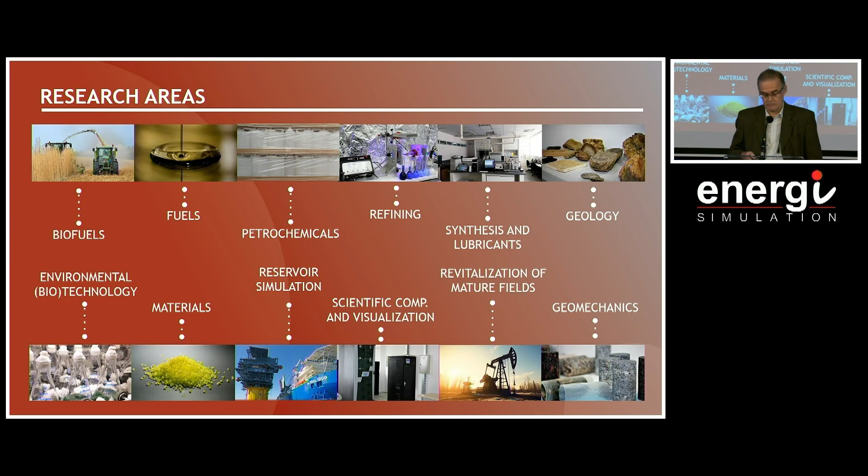And well, this is our integrated lab in Recife, Brazil, that now, since last year, is an institute. We have about 12 labs in different areas related to the oil and gas industry. And of course, we have geomechanics, geology and reservoir simulation, the teams related to this chair. And so we are here in Recife, Pernambuco, Brazil, in the northeast part of this country.

Everyone is talking about production, but very few people are talking about storage. So this is very interesting. It's an opportunity. We are already in contact with companies that are interested in storing hydrogen in salt caverns, since we have onshore salt caverns in this region. Again, on the coast we have industries. For instance, in our port, we have a refinery and a thermal plant for electric energy generation. So we have production of CO2, and there are also discussions about CCS.

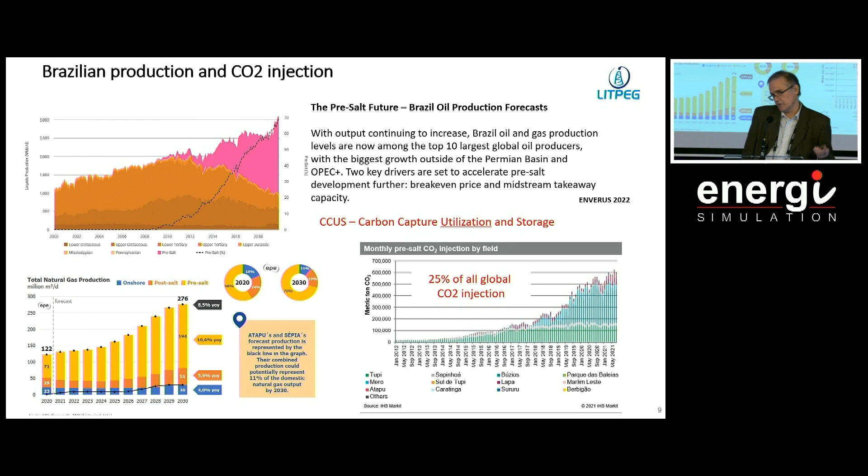And so we have this concern with injecting CO2. CO2 can dissolve in the water, and we have acidification, and then we have dissolution of minerals that will affect porosity and permeability, and change the properties of the fractures and the geomechanical properties of the rock. And this is the research interest that we have.

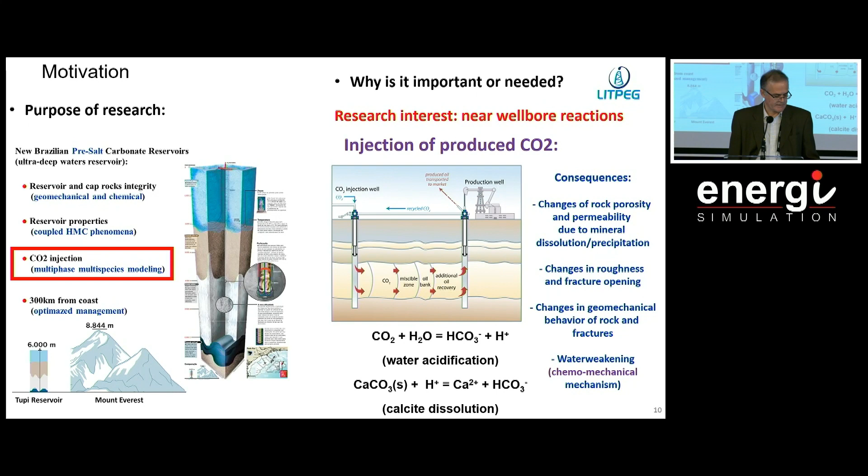And the chair is the main topic. So we proposed three years ago to apply this work to this problem, for both EOR and CO2 injection for CCS. But just now I will have the opportunity to apply it in CCS, because it's now becoming a reality in Brazil. The title of the chair is reservoir modeling and robust optimization, and the ingredients are outcrop characterization.

We have geologists in our team, upscaling, geomechanics. By the way, we have a poster presented by Aline on submarine landslides in a very important field in Brazil, where you have to do some slope stability analysis. So check the poster, it's a very interesting project.

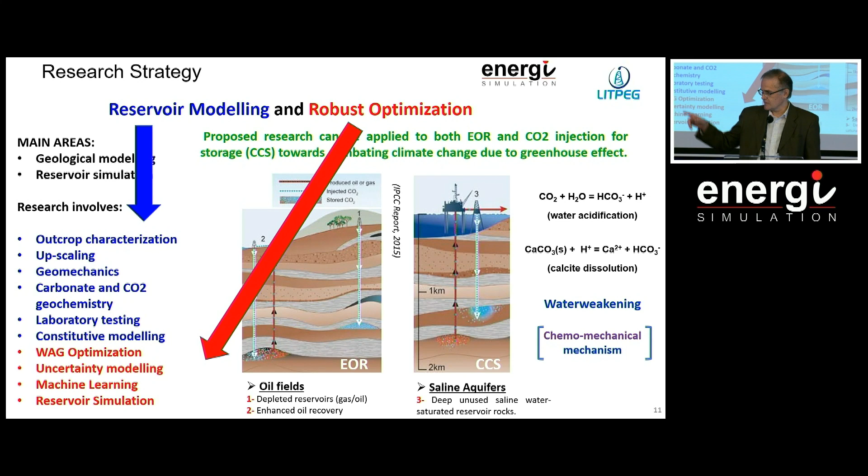And also laboratory testing, constitutive modeling, that I'll talk about here. And also optimization, uncertainty modeling, machine learning. We have a new project as well with Petrobras, on optimization with machine learning, that Alexandre presented in this session's posters as well.

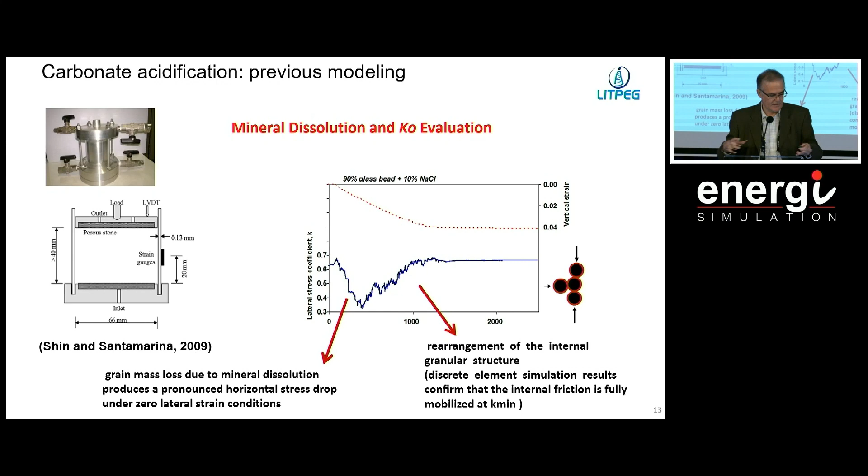So in this problem, this is a previous work that I showed you a few years ago, where we have this oedometric test: we apply a vertical load, we inject a fluid that will dissolve the rock, and we are able to measure the lateral stress, as we restrict the lateral displacement. So you have a decrease of the size of the sample, a loss of compression of the sample, and a decrease of lateral stress due to mineral mass dissolution. After that, with rearrangement of the internal granular structure, you have a tendency to dilate, and as we are restricting the displacement, we have an increase of lateral stress.

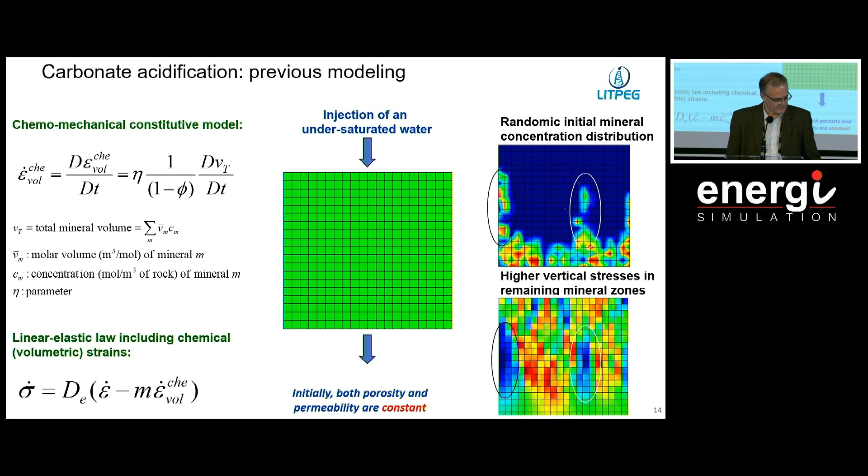Okay, so we can establish a chemical-induced deformation that is a function of the total mineral volume. In a finite element code, you have to run the reactive transport behind this to get the total mineral volume, and if it changes, we can induce deformation in the model. If you inject a reactive fluid, you can see here the front of dissolution, and where the mineral remains we have higher vertical stress, a non-uniform stress in the sample. You can model this and obtain, for instance, this decrease of lateral stress.

And if we consider elastoplasticity, a very simple Mohr-Coulomb model, we can introduce this envelope. And if we introduce softening, when the Mohr circle reaches the Mohr-Coulomb envelope you have softening, so we come here, and the only way for the lateral, horizontal stress is to increase, so we can have this increase of lateral stress. But unfortunately, it's not enough. We can do this qualitatively, but it's too simple. We cannot get a good correlation for more than one test.

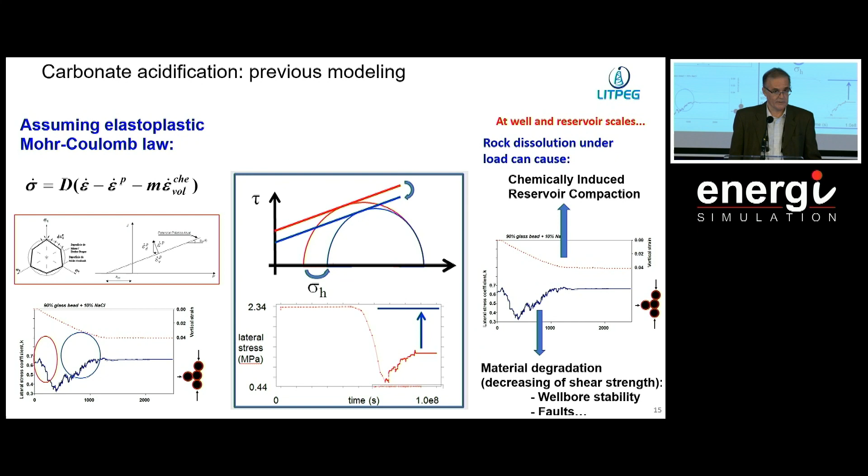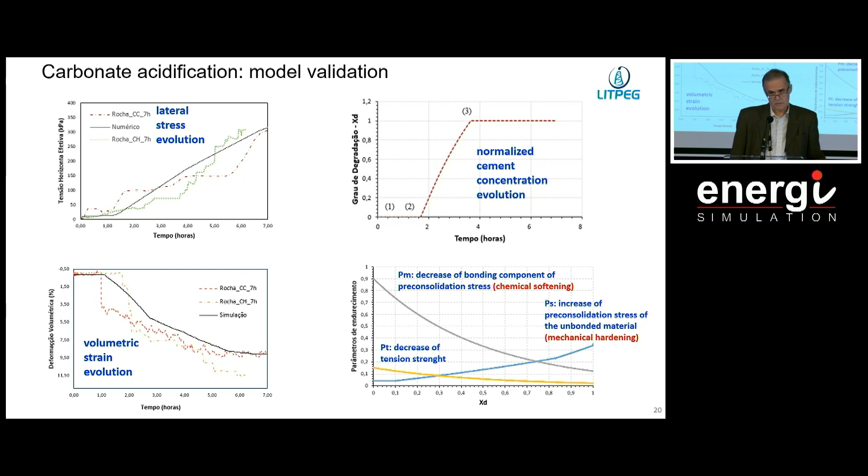What happens is that this surface is shrinking. This yellow surface is shrinking, and the internal surface is expanding. And so you have chemical degradation and pore collapse. And you also have the decrease of tension strength of the material. So we are happy with this, but it's not enough, unfortunately.

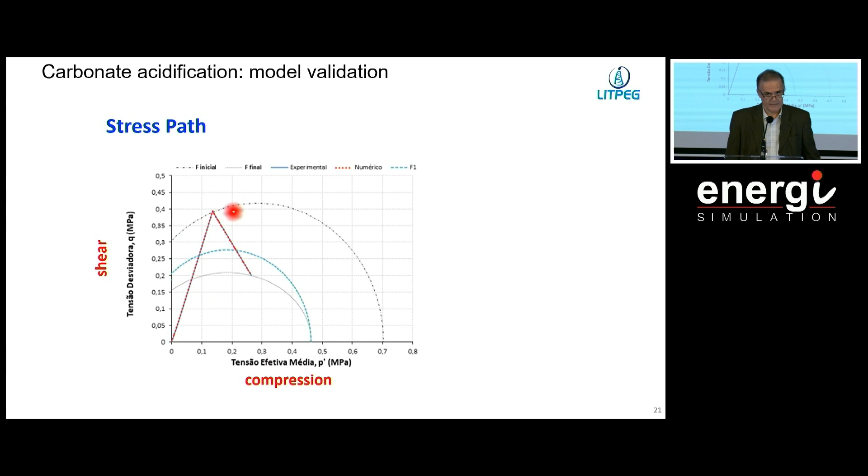Okay, we could obtain a very good stress path of the sample in the compression and shear space. So we can see here that the stress path during the test is the decrease of shear stress and increase of compression. And this is due to the decrease of elastic domain of the samples as it loses its cementation.

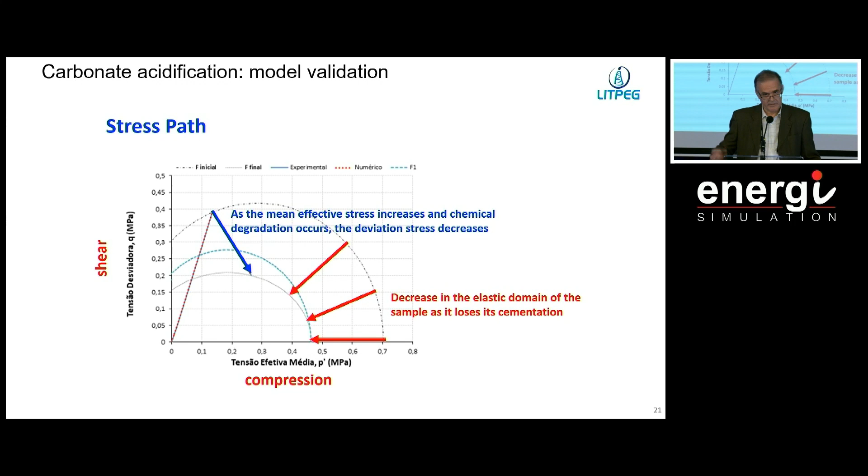So the initial yield surface is this one. So when you have the shrinkage of the yield surface, the stress state has to move from this point to this point, decreasing shear stress and increasing compression. So it's an elastoplastic mechanism that is triggered by the chemistry. And so as I mentioned, we are not there yet.

There is an important aspect that we have to implement in our model that is related to stiffness of the material. When we expose the samples to acid solution, we have the decrease of the stiffness, but sometimes it's not intuitive because you can see that all the samples with different acids decrease the stiffness here.

But if the acidification is too aggressive, we have the formation of wormholes, and so all the other parts of the material will not be degraded, so the flow will be concentrated to the wormholes. And in fact, the most acid, the pH 2 solution, is less degraded than pH 4 and 3. So it's complicated because you have to include chemical damage depending on the Damköhler number. The Damköhler number controls the formation of wormholes in the sample.

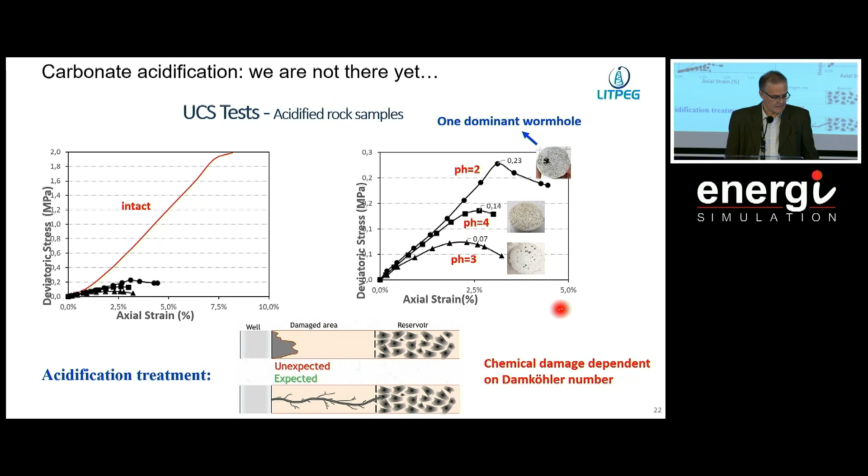So it's interesting because for low Damköhler number, you can have the damage area very close to the well. And for higher Damköhler numbers, you can have the wormhole, and then degradation will be a little bit far from the well. So the way that the chemical attack will happen depends on the rate of the injection of the reactive fluid. And yes, so it's in progress.

We have a new project with Petrobras. All this project is only experiments, but we are going to use these experiments to improve our model. In this case, it's Victoria. She was in the poster, and she's in charge of this project. We are using acidification of Indiana limestone.

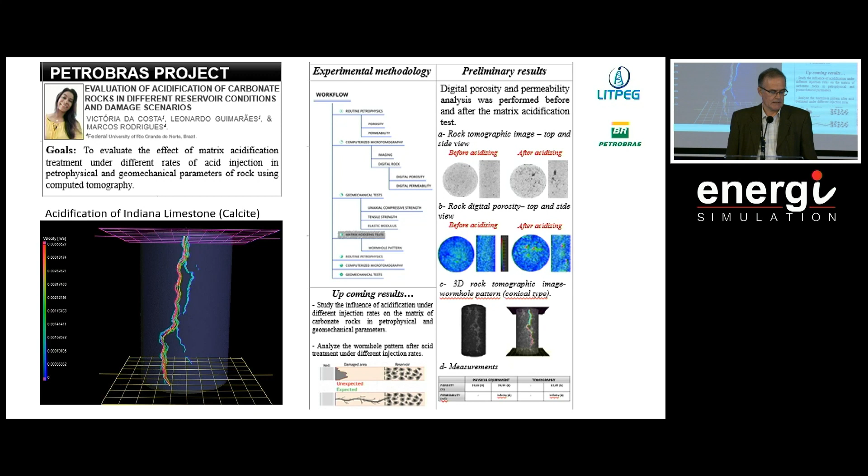Now we are working with natural carbonates. And the idea is to inject acid solutions and to check now using a triaxial test how this degradation can take place in more realistic rocks. We are going also to use rocks from outcrops, because in the next work that I will show, the composition of the carbonate will affect a lot the acidification.

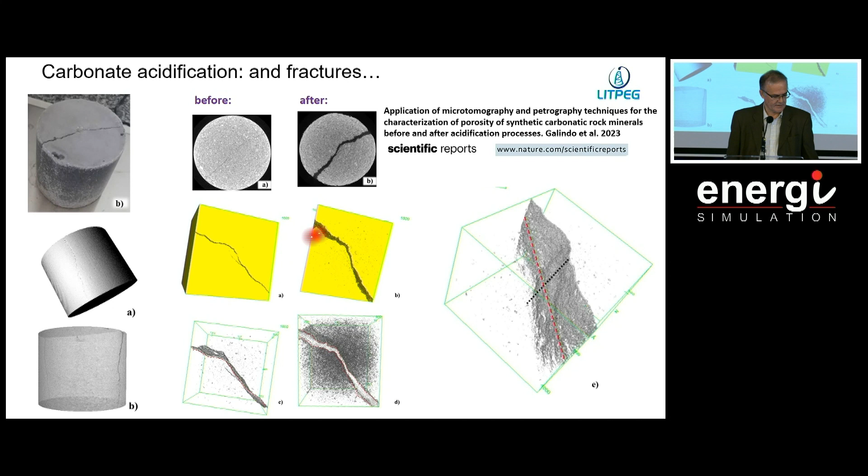So, Katia did also work in fractures. So you can see that the fractures increase the aperture when we inject an acid solution. And in previous work done with natural carbonates from outcrops, this PhD student, Minnel, injects acid in a fracture and shears the fracture. And we can see here that channels are formed for the fractures. So the peaks of the faces of the fracture are not dissolved.

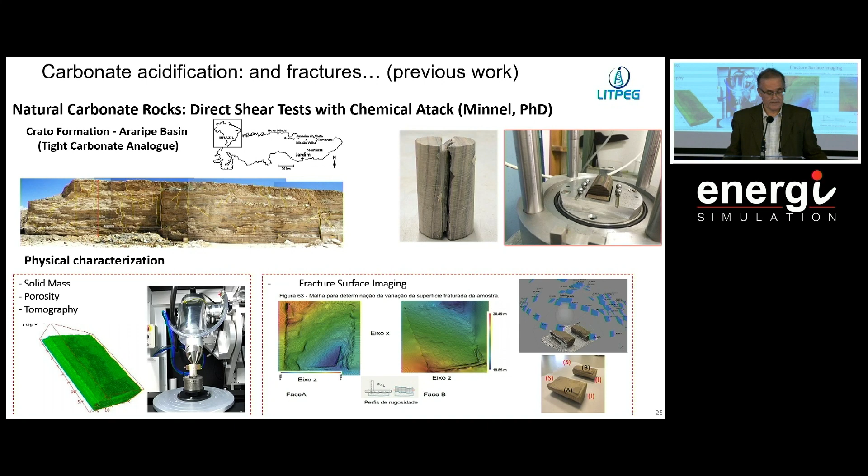So what we observed, the final conclusion of this is that for this test that she performed, the mechanical shear is much more effective in the degradation of the shear strength than the chemical attack.

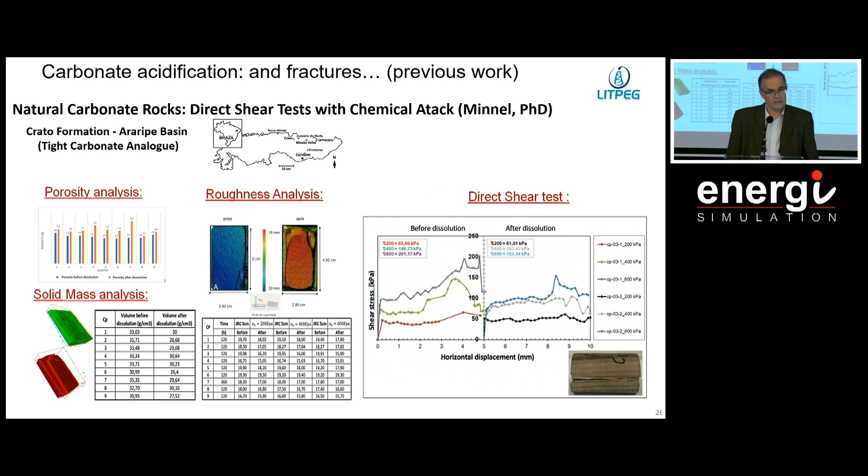And in the poster section that Ximena presented, she went to KAUST to perform another type of shear test, where we injected in the center of the sample in a tube, it's a well that injects acid, and we can have the flow of the acid solution from the center towards the outside of the sample. And it's very nice equipment. This equipment was designed by Carlos Santamarina, who is now at Georgia Tech.

But the collaboration was with Thomas Finkbeiner from KAUST and Alejandro Cardona from Texas University. And with the equipment we can have normal stress, shear stress by torsion, and injection of acid.

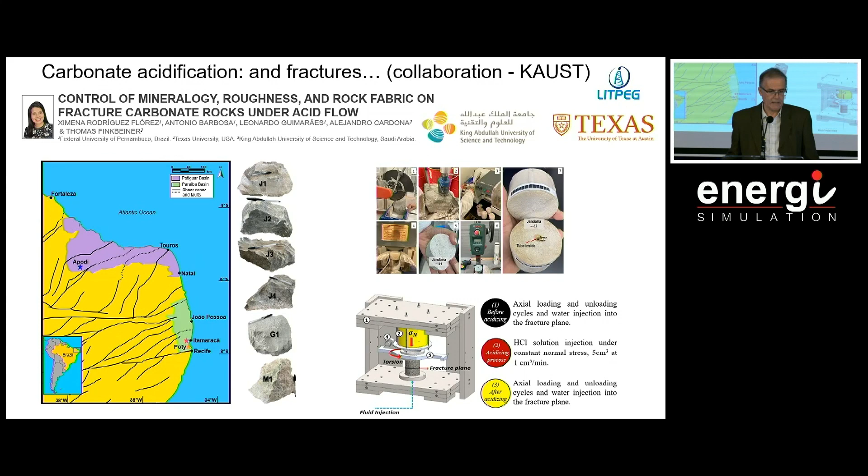Okay, I will not have time, but I just mention that Ximena shows qualitatively very similar results as the previous work. For roughness, she tested smooth and rough fractures, and you can see channels that form in both types of roughness. And we also have the effect of the load and unload, much more important than the acidification for this test as well.

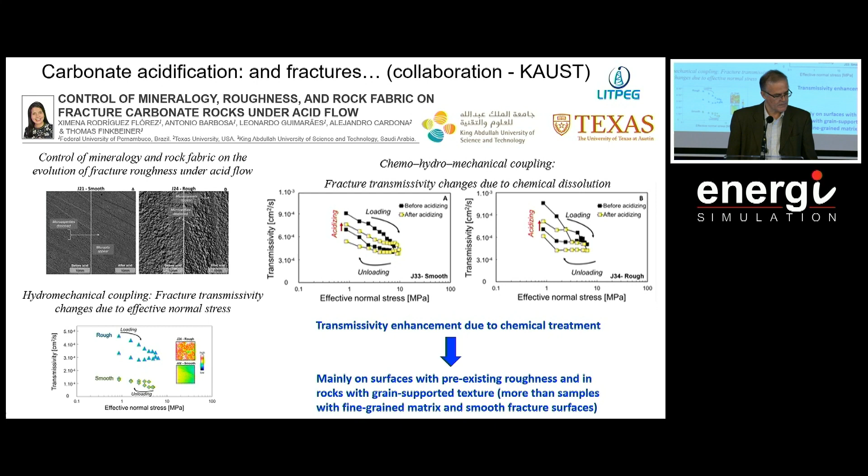So the transmissivity enhancement due to chemical treatment is mainly on surfaces with pre-existing roughness and in rock with grain-supported texture, more than samples with fine-grained matrix and smooth fracture surface. And well, some conclusions. I will be quick here in the conclusions.

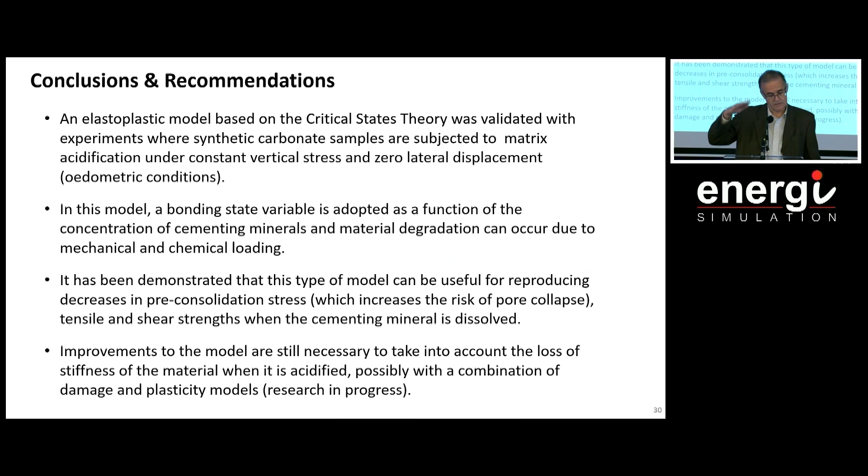We validated a critical state theory for degradation of matrix rocks using bonding variables, but we have to improve these models, considering damage in this degradation of the stiffness. But formation of wormholes increases the challenge, and we have to study it more carefully. So for this reason, we are going to natural rocks. It is the project that I showed you.

And in the fractures, of course, mechanical action, such as shear and compression, seems to have great impact in comparison to the impact of chemistry. And the composition of the rock is another aspect. Ximena tested 3 types of rocks with different compositions, and it has an influence on the behavior of the fracture.

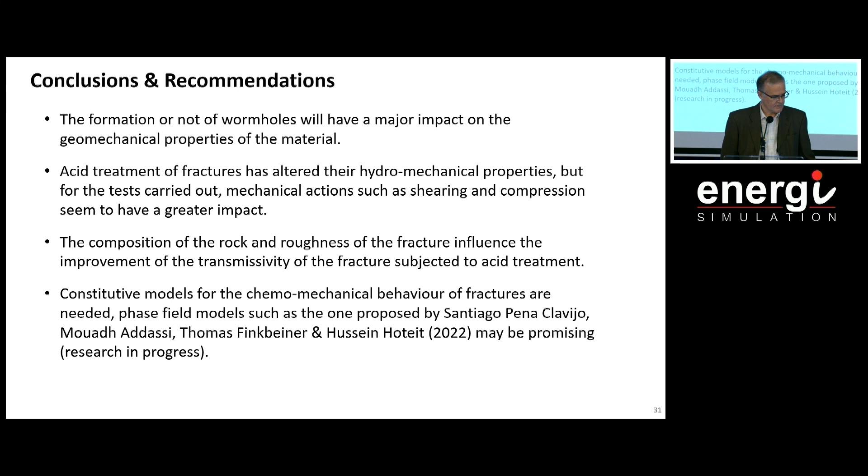And we have research in progress. We are doing some modeling using phase field models, such as one proposed by our colleagues from KAUST, that can also do the dissolution of the fracture and is also able to study crystal growth. That is a problem that, as we see in the presentations, is very interesting for CCS as well, when we have precipitation of minerals.